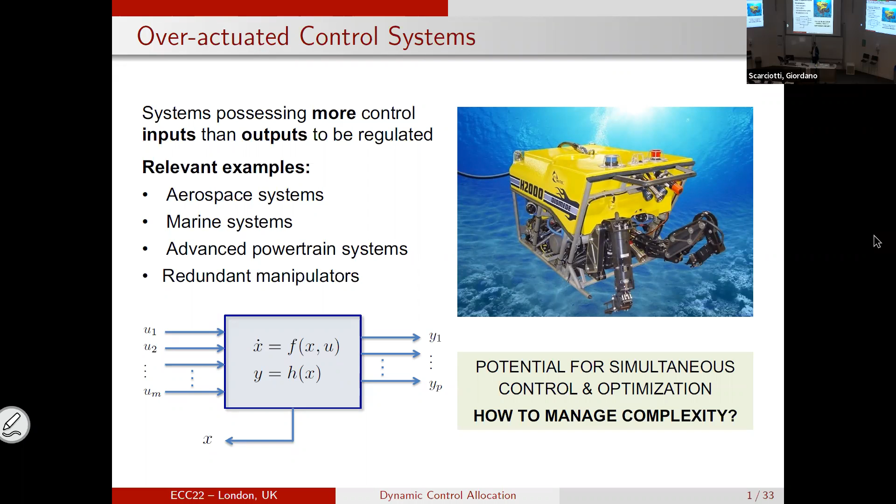So this being a fairly common nowadays setup, let's take a look at a couple of examples of over-actuated systems, because these examples give you a hint that there is perhaps a little more to over-actuation than simply having more things to deal with. The traditional idea of control allocation and over-actuated systems stems directly from aerospace applications. Everybody has flown an airplane in their life.

If you sit by a wing, you see a lot of movable surfaces going on. Of course, one cannot really see the tail effectors, because otherwise that would be a problem. But you see that there's a lot of things that move when you take off, when you land, and when you steer, when the pilot steers the engine.

Typically in civilian applications, all these control surfaces generate moments, or are thought of as moment generating devices, meaning that you have a lot of control inputs aiming at producing the three body moments around the axis. And typically in civilian applications, the resulting forces, called the body forces, are actually named the small body forces because, well, they may not be that small, but we think they're small, so we ignore them when we design control policies.

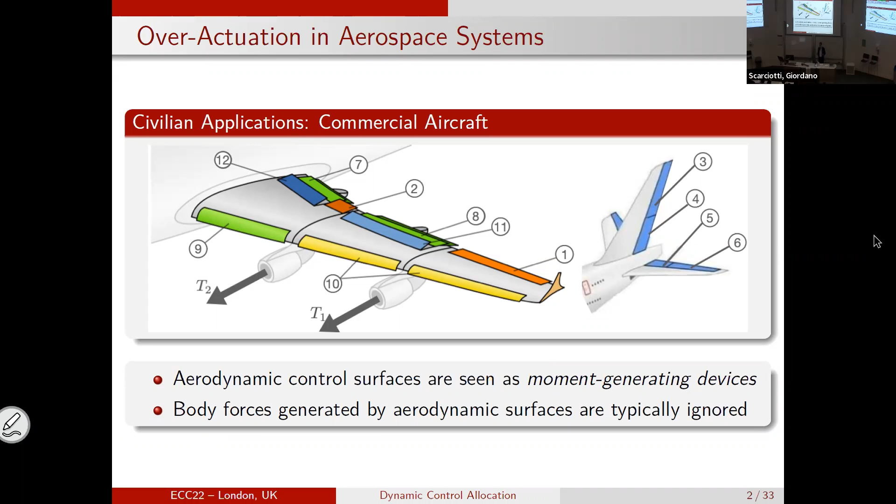Now this changes dramatically when within the aerospace area you start looking at more performant types of vehicles, for instance fighter jets. Fighter jets are again equipped with a redundant set of actuators, but the type of actuation that results from this control suite is actually very different, because now you have the presence of multiple surfaces that are typically not seen in commercial aircraft, for instance canards, and canards are very interesting actuators, so we will talk a little bit more about this later.

You also have, for instance, unconventional actuation capabilities like thrust vectoring, meaning that your thrust is no longer confined in one axial direction as in conventional aircraft, but has the ability to change angles, so to produce not only a force in the X-body axis, but also forces around the other two body axes, which gives you almost 6 degrees of freedom controllability in certain aircraft. Well, of course, almost, because you can't really fly like this - that's too much drag to begin with. And also you have enhanced maneuverability, which is dictated by the very reason of existence of this type of vehicle.

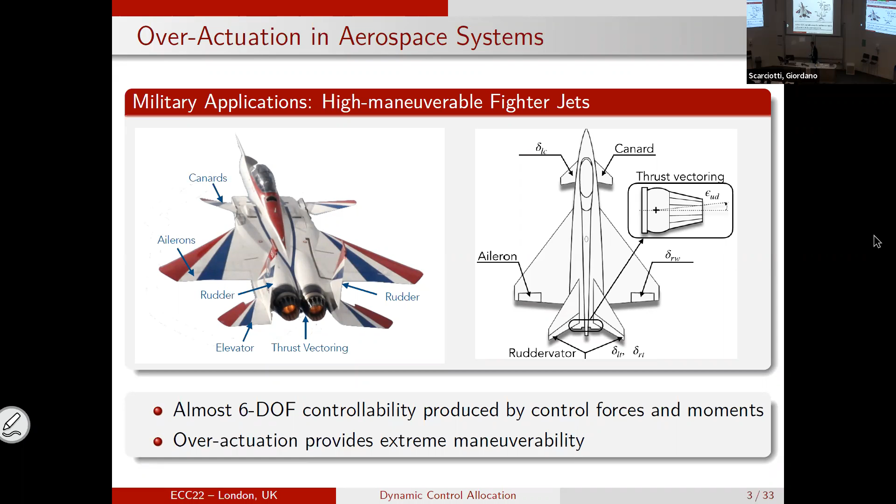So you see already that within the same type of application, perhaps there is a difference between one way of looking at overactuation with respect to another. Obviously this is not a new problem, it's been around for a long time, and there is a considerable body of literature on that.

So if one thinks about overactuation, you say, okay, I have a control problem, I know I can do more. Whenever you do more, you want to optimize what you're doing, because now you have the freedom to do better by having more actuations at hand. So obviously, when you talk about optimization, online optimization, model predictive control is the natural way to go. And as a matter of fact, there is a substantial body of literature that deals with control allocation and distribution of control efforts by way of model predictive techniques.

Our friend Ilya Kolmanovsky is one of the main contributors in this area, specifically related to control allocation, but many more as well. So now, what is the pro of looking at solving the problem of control allocation, simultaneous control and optimization through model predictive control? Well, the pro is that in a model predictive control type of framework, we know we can design directly our controller to be mindful of constraints, both in the input and in the state variables. And also it is of general applicability.

However, at least for me, I don't understand much about optimization, I have to confess. Model predictive controllers are quite cumbersome to tune. They don't scale really well with the dimensionality. But the thing that I was very interested in is that model predictive controllers are not modular.

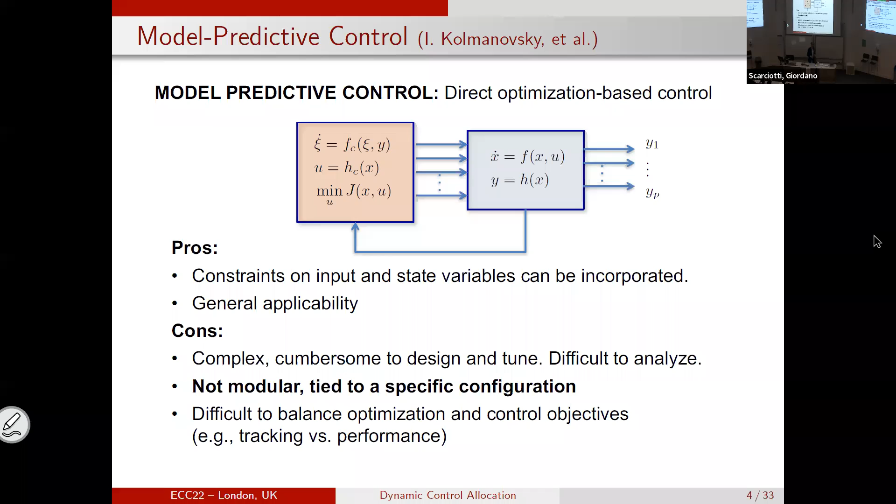Obviously, model predictive controllers embed everything in one piece, successfully I have to say, but they do not lend themselves to a modular structure. Also, it's very difficult, at least I find it difficult, to separate the tracking performance from optimization of auxiliary values.

Perhaps the premier methodology for dealing with a redundant set of actuators is the so-called control allocation.

Control allocation has a long-standing history, started from the work of Wayne Durham for aerospace application, and then continued with many researchers. I'd like to mention our great friends at NTNU, Tor Arne Johansen, Thor Inge Fossen, and Andrea Cristofaro, who may be in the audience, who have contributed to this sort of thing. Tor Arne and Thor Inge are mostly interested in applications in marine vehicles and underwater vehicles.

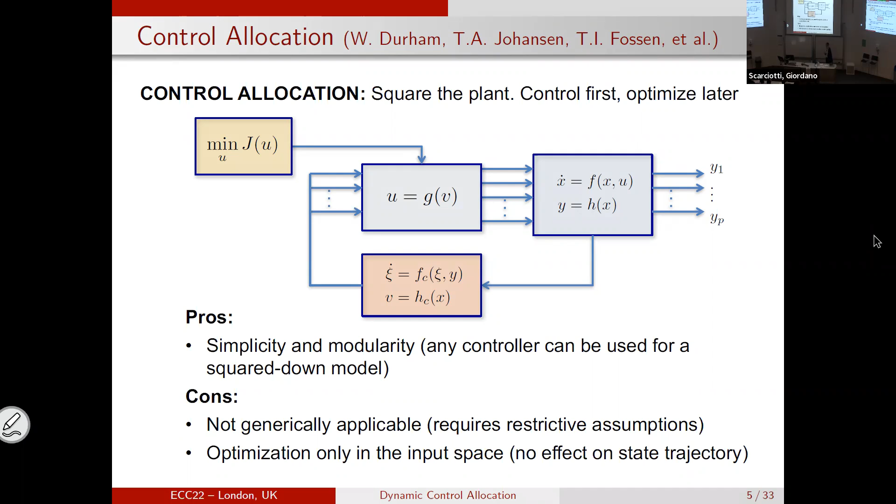So now let's take a look at control allocation in a traditional way. Okay, so what do we have? We consider a nonlinear plant model, but the nonlinear plant model here is just because I want to be fancy. If you want, you can replace it with a linear model. Really nothing is going to change.

I know there's a little bit of geometry in the title of my presentation. It's not going to be any differential geometry, okay. The geometry you'll see is in a linear setting, but the ideas remain the same. Everybody who says that nonlinear systems are so different from linear systems is telling a lie — at least from the geometric point of view, it's just a linear system bent, in a certain sense. Okay, so Isidori is going to kill me. Is Alberto in this audience? No, okay, that's good, he left, okay great.

Okay, so we have an affine system. The main issue here is that the control input is higher dimensional with respect to the regulated output, so M is greater than P, where M is the number of inputs. But the standard assumption here is that the rank of the input operator, the B matrix, is actually equal to the number of outputs to be regulated.

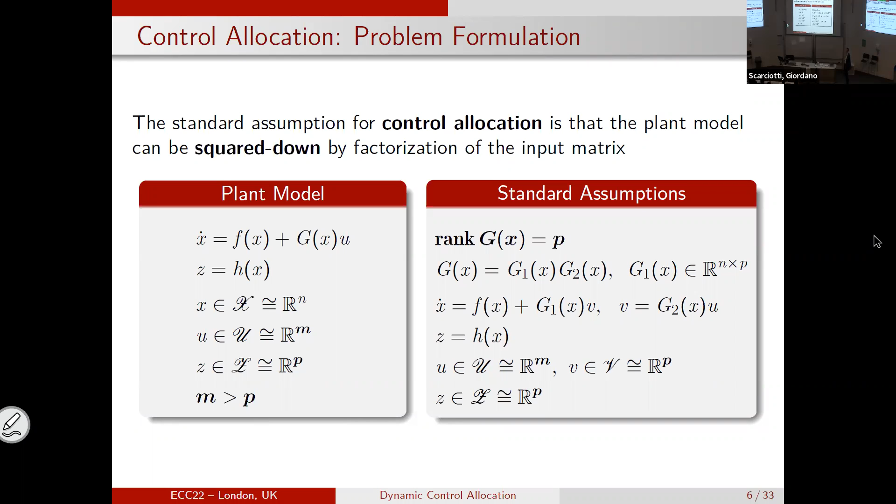So which means that you have a rank-deficient input operator, and therefore you can factorize the input operator in such a way that you can now redefine a fictitious input, a virtual input. Virtual input is one of those fashionable terms dating back to the 90s in backstepping control. So you have a virtual input here, and you can now think of this system as being a square system for which you have a plethora of control design methods. Now you have the task of going back from V, where you've designed your controller, to U, which is where your physical actuators reside.

So pictorially, we can represent the situation in the following way. You have your plant and your input operator G, which is factorized into G1 and G2. Then you identify this virtual controller V, same dimensionality from V to Z, which means that if you're trying to find, let's say, a tracking controller, this tracking controller is essentially unique, okay?

There's modulo some initial condition you set on the inverse dynamics, but ideally you can think of this as a unique solution to your tracking problem. And now what you do is take the same control devised for the lower dimensional input, and distribute it across the set of redundant actuators through control allocation, typically done by static optimization or some type of gradient descent or dynamic optimization.

So you may ask, what is wrong with this picture? Absolutely nothing. This works very well and has led to a lot of solutions which are both imaginative and very elegant. And again, I'm the least qualified person because I'm not very strong in optimization, but I'm amazed at the type of solutions, and these solutions work, okay.

But there is one slight problem. Well, first of all, from my own perspective, I like to see the structure of problems, I like to see the geometry that's behind a certain setup. So I'm always wondering, what are the necessary and sufficient conditions for the solution of a problem? And this comes with the fact that not all the models that we work with, stemming from technological applications, fit nicely into this framework.

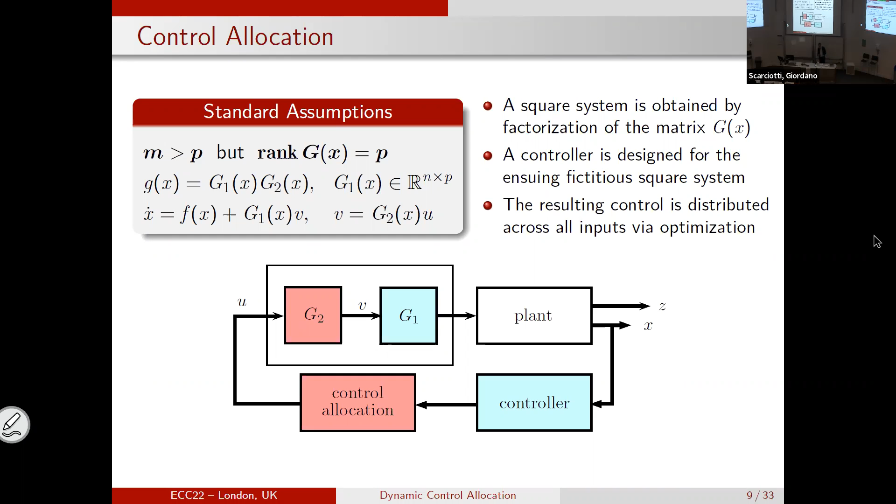As long as you confine yourself to aerospace and you just don't think of the body forces generated by the actuator, this is perfectly fine. However, when you start going a little bit more fancy or imaginative in your array of set of aerospace vehicles, things change.

And I want to point out this super nice object here. This is what is called a modular drone that was conceived by the group at CASY in Bologna, led at the time by Lorenzo Marconi and Roberto Naldi. This is nothing else but a tail-sitter MAV, okay? It has one big thruster here, producing a thrust, and then it has 8 control vanes, control surfaces, and you typically want to control the position of the center of gravity of the vehicle and the heading angle.

And you have 9 control effectors, 1 thrust and 8 control surfaces. And you look at the dimension of the output, you want to control 4 outputs, and you look at the rank of the matrix G, the input operator, the rank is 4, bingo, you are exactly in the setup of the traditional, let's call it this way, control allocation problem.

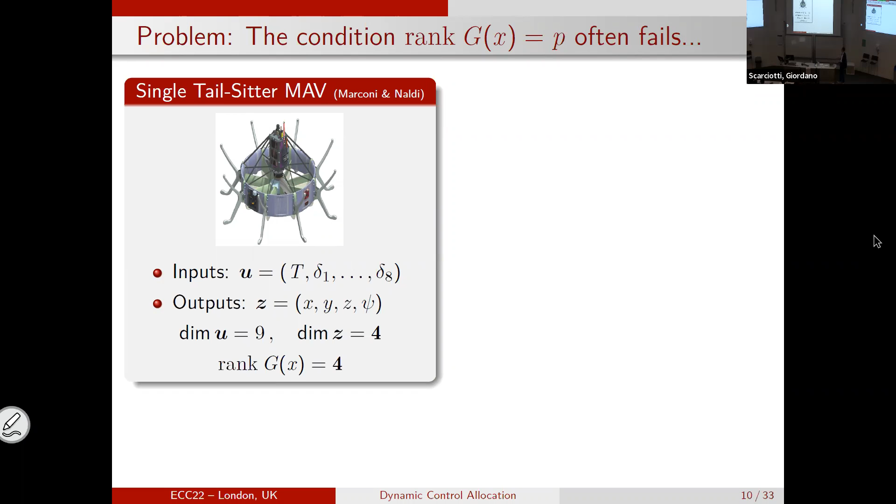But this tail-sitter MAV, as conceived by Lorenzo and Roberto, was not meant to be left alone. It was meant to be attached to each other in several modules. So if you now take 2 of those and connect them rigidly in this way, now you are doubling the number of inputs, which is as expected. You have 2 thrusts, you have 16 control vanes. Of course, you have constraints because otherwise you will rip the setup apart.

But you want to control the same thing, okay? Because now this is, again, a rigid body. So what I'm interested in controlling is the center of gravity, the position of the center of gravity, and the heading of the vehicle. But now I have an enormously dimensional input space, again, with the constraints in place. 4-dimensional control output, but now I look at the rank of the matrix G, and magically something happens: the system has gained in the rank of your control matrix.

Which now starts saying, oh, okay, controllability distributions. So that's something more that you can do now, not just in terms of regulating these four outputs, but perhaps now there's a new direction. But most importantly, the first order outcome of this is that this is no longer within the assumption of the control allocation, because now the rank is greater than the number of outputs to be controlled.

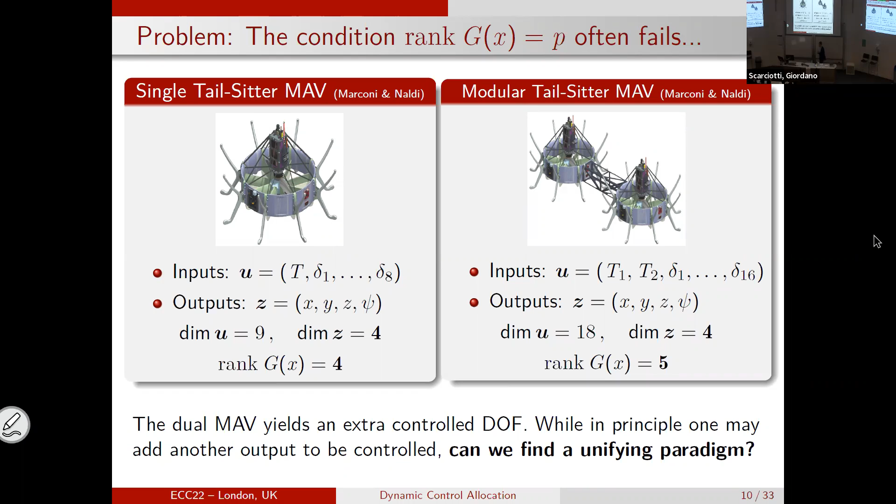Okay, you say, this is not a big deal, I can identify a new output that I want to regulate and go back. But this is precisely what I don't want to do. I don't want to just settle for something that is dictated by my control policy. I want to understand what's happening and maybe devise a control policy that is more unifying, that can deal with the previous situation and this new situation, in such a way that I don't have to reshuffle my control problem all the time. But wait, there's more, okay?

So this is the one situation that I was dealt with when I started working at AFRL. What you see here is a pictorial representation of a hypersonic cruiser. There's a lot of talk about hypersonic vehicles these days, mostly for unfortunate reasons, in the context of the war that is going on. Well, this is AFRL, so they are in the business of building weapons to a certain extent.

But let's take a look at the longitudinal dynamics of this vehicle. This type of vehicle has its own aerodynamic issues. Their dynamics, although written in the same way, are slightly or dramatically different than the dynamics of conventional aircraft. But let's not get into many details, let's just take a look at the longitudinal dynamics of this vehicle.

This is the dynamics in the vertical plane. Very simple dynamics comprising the airspeed, the flight path angle, the pitch angle, the pitch rate, and the angle of attack, defined as the difference between these two. So what are the inputs here? The inputs are the thrust generated by the scramjet engine and the elevator deflection that actuates the moment.

If this was a conventional aircraft, I would say I'm thinking of the elevator deflection as the principal actuator that generates the pitching moment, and everything is okay. Unfortunately, what you see here is that the lift force, the force that keeps the vehicle afloat, also depends on the elevator deflection.

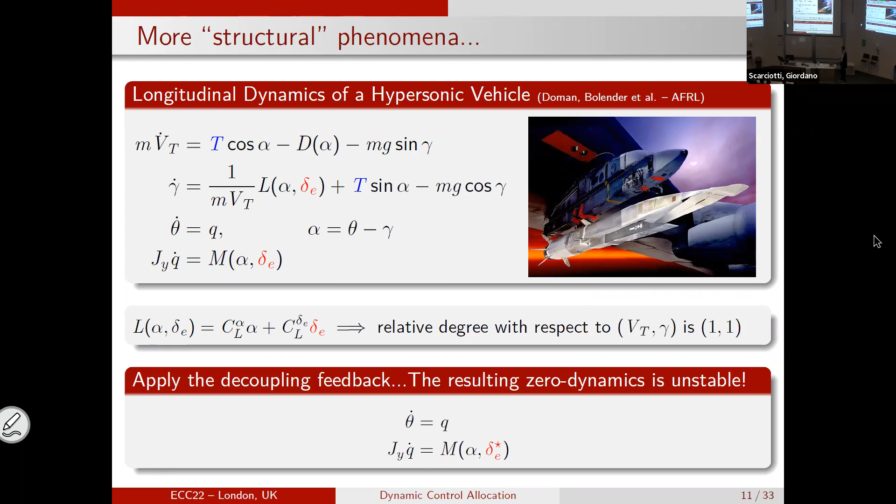So we'll say, okay, let's equip this vehicle with a non-conventional actuator, which is a canard. A canard is this additional control effector that is put fore of the center of gravity. Now, what a canard does is it changes the controllability of the vehicle in a very fundamental way. Well, not really, but I'll explain why.

So basically what you have now is two surfaces. It's no longer just an elevator, but also a canard. And the canard enters in the same forces and moments as your elevator. So now you have two surfaces to play with.

And obviously what the aerospace people do is say, let's just design the canard to get rid of the elevator contribution on lift. This is called ganging of the surfaces. So basically what the elevator does, the canard does in the opposite direction, so that there is no more contribution of the elevator to the lift force.

And for us control people, this means now that - okay, this means now that the system has full relative degree. Of course, you need to add a little bit of dynamic extension. The system is now fully linearizable by feedback. You cannot really make it fully linearizable because you don't know the dynamics, but that's a different story. From a structural perspective, you gain full relative degree and you're super happy.

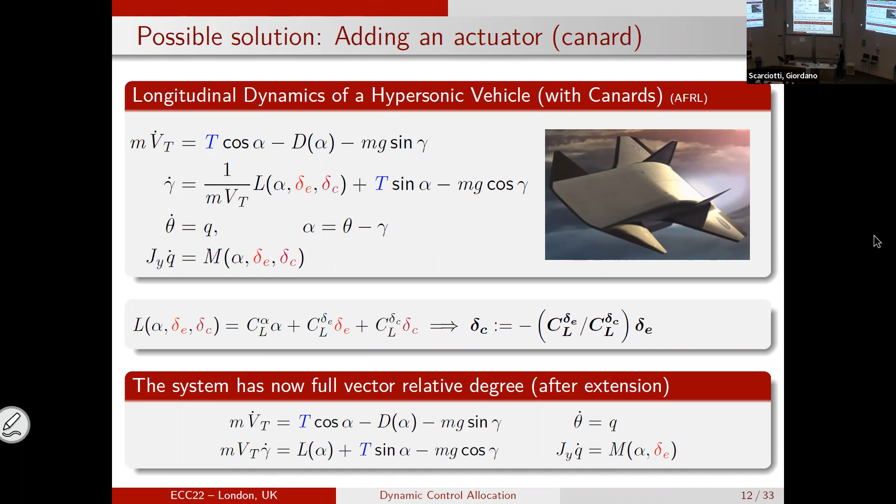This is a new example to draw inspiration from. We are not just happy with the technical solution to a problem, we want to understand what's behind it. So structurally, what is the deal with over-actuated systems? By structurally, I mean from the point of view of the geometry of your system, what is going on when you have more inputs than outputs.

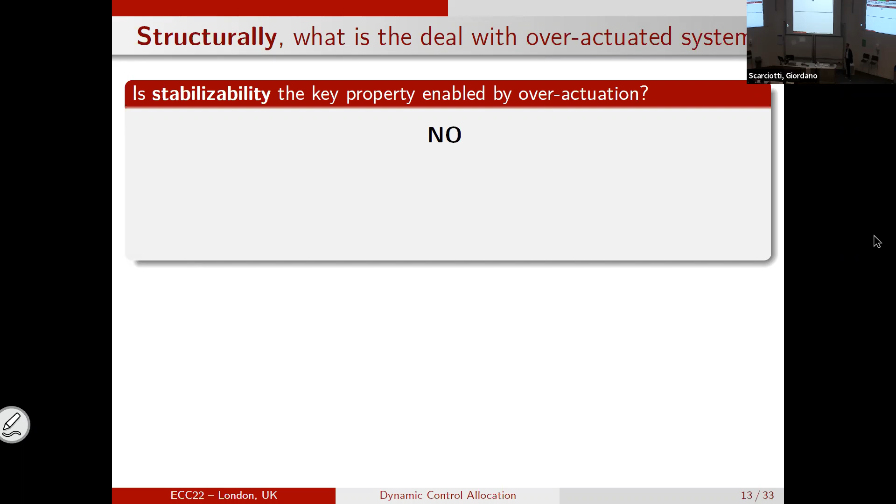The first thing that comes to mind, if you look at the previous example: I didn't know how to stabilize the system first. I had the canard, now I know how to stabilize it. Therefore, over-actuation has all to do with stabilizability. No, it has absolutely nothing to do with stabilizability. In the previous problem, the aerospace vehicle, the problem is us, not the system. The problem is that we don't know really well how to control non-minimum phase, non-linear systems.

But that has nothing to do with the amount of inputs that you have. Of course, if you don't have enough input, there's nothing you can do. But there's something that we have understood from the previous example, and this is the key, in my opinion. When you add the canard, you're not changing the fact that you can stabilize the system, because at first approximation, the system remains stabilizable with just the elevator. What you did is change the structure at infinity of the system. When you go from relative degree 1,1 to full relative degree, what actually happens is that you remove the zero dynamics.

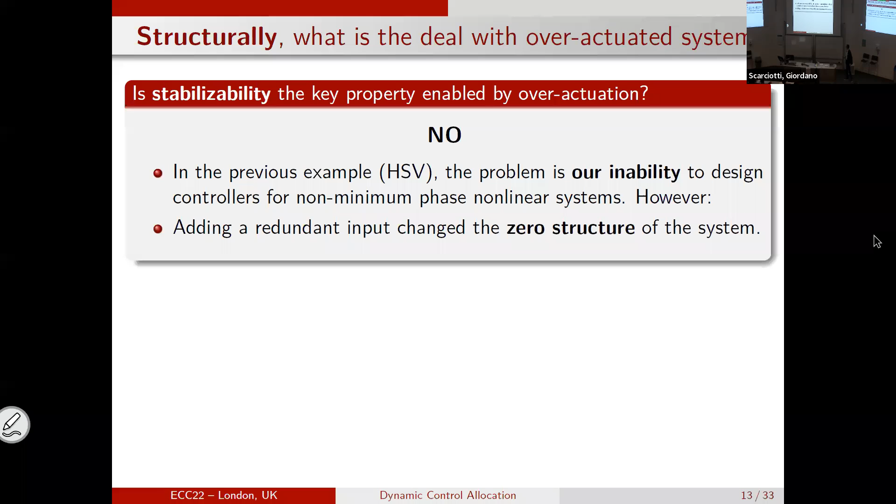Thinking linearly, because there's no way you can understand anything if you don't think linearly. This may come as a surprise to you, but perhaps not the old timers in the audience: controllability is a generic property for linear systems in the space of parameters. Meaning that if you have a system that is non-controllable, that's an oddity, that's a singularity. It's an open property in the parameter space, controllability. And it has nothing to do with how many control inputs you have. You only need one control input.

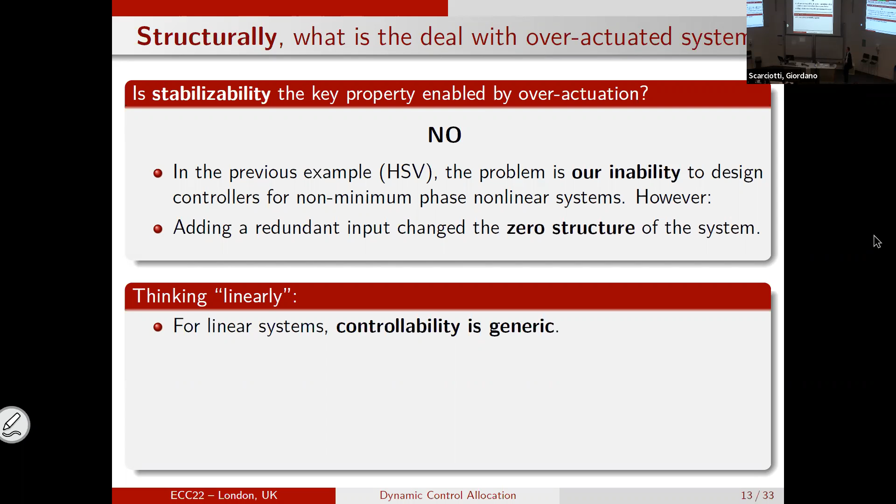And as a matter of fact, many of us remember that there is a technique to control multi-variable linear systems by applying a preliminary feedback. So you make the system controllable with just one input, and then you apply the Ackermann formula. Is that a good solution? Probably not, but it's a solution. So controllability is generic, has nothing to do with how many control inputs you have.

But what you see from the HSV example is that the canard has removed the invariant zeros of the system. Without the canard, your largest controllability subspace, which is basically the set of trajectories on your zero dynamics that are controllable, is zero, because you don't have any more control inputs than the one you need for tracking. What you have is that your zero dynamics is isomorphic—I apologize to all the geometrists and algebraicists in the audience—to V star mod R star, which is the subspace of the factor space where the induced map has unmovable eigenvalues. Basically, these are the zeros of the system, and that's where the zero dynamics tells you this is non-minimum phase.

When you add a canard, your zero dynamics becomes fully controllable. So your system remains stabilizable, your system remains controllable, but now you have extra degrees of freedom to move the invariant zeros. Therefore, you can assign eigenvalues to what was previously an unassignable dynamic induced on the factor space.

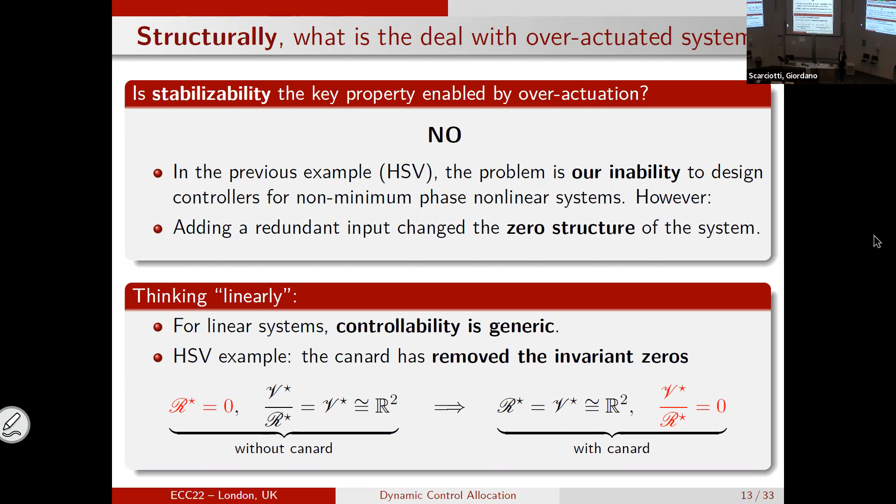Which means that overactuation fundamentally has something to do with the zero structure. And when you think about zero structure, you think about the zero dynamics. We all know that the zero dynamics is a very powerful concept for stabilization, and we have countless applications of zero dynamics. Backstepping is zero dynamics—it's redefining the zero dynamics at each step. But there's one thing that is the true essence of the zero dynamics in the system: the true essence is the right inversion of the system.

Now, when you do tracking, you have to do two things. You have to generate a motion in your system that produces the output that you want, and then you want to stabilize that motion.

So there is no escape when you solve a tracking problem from solving an inversion of your model. So let's recall what is the right inversion of a system.

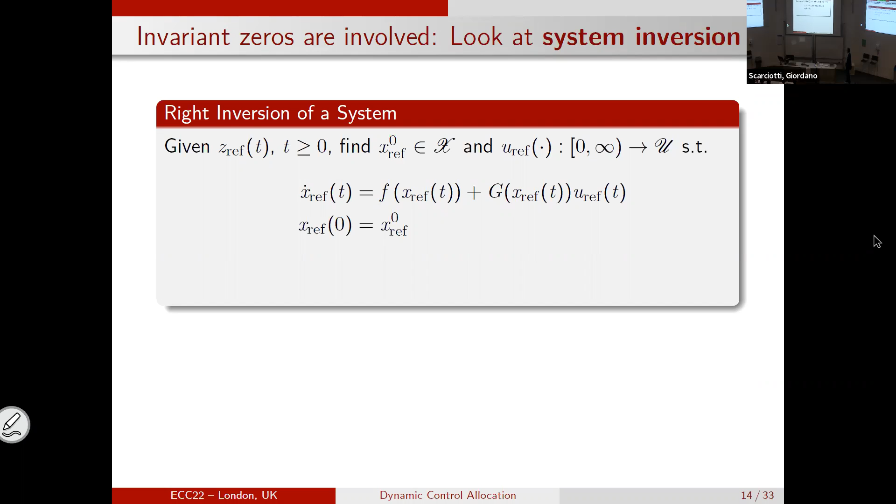You are given a reference in the output. You want to find all pairs of initial conditions and open loop inputs such that when you initialize your system at the right initial condition and apply the right input, magically your system reproduces in output the reference trajectory that you want. And that's precisely what it's written here.

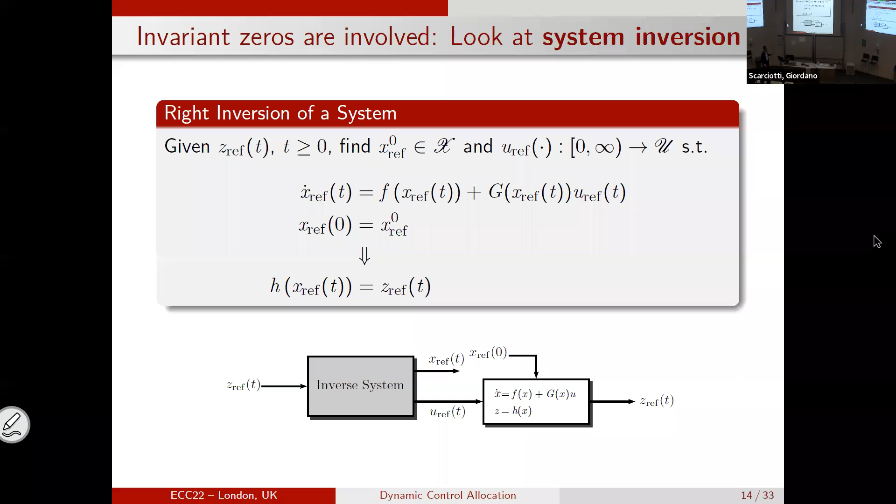So now the connection is starting to unfold. More inputs does something to your zero structure. The zero structure is intimately connected to your right inversion of a system.

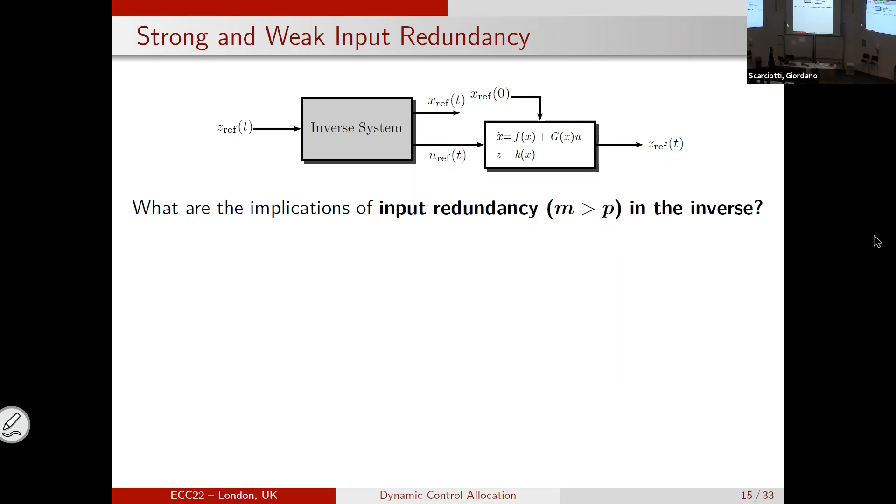But now let's see what are the implications of redundancy, m greater than p, not on the plant model. I'm no longer interested in the plant model. I'm interested in the inverse, the right inverse of the plant model.

So now we have all the different situations that are possible. The number of inputs is greater than the rank of the input operator, but the rank of the input operator is equal to the rank of the output map, the differential. Think about the C matrix, doesn't matter, which is equal to P.

This is precisely what Luca Zaccarian in a nice paper in Automatica called the strong input redundancy, and I shamelessly use his terminology here, although Luca did this for linear systems in transfer function form. This is precisely the situation of the traditional control allocation.

The second situation, Luca calls it weak input redundancy. Now you have a full rank input operator, same number of inputs as the rank of the matrix B or G, but this is strictly greater than the rank of the output map, which we just take equal to the number of outputs.

This is a situation precisely where traditional control allocation cannot be applied. This is not what happens. And then you have a general input redundancy, which is the two of them combined.

This, number 3, is the multiple drones of Lorenzo and Roberto. The weak input redundancy is the case of the hypersonic vehicle. Of course, there is an uninteresting case, which is the one where the rank is less than the rank of the output, but this means that the system is not right invertible, so we don't care.

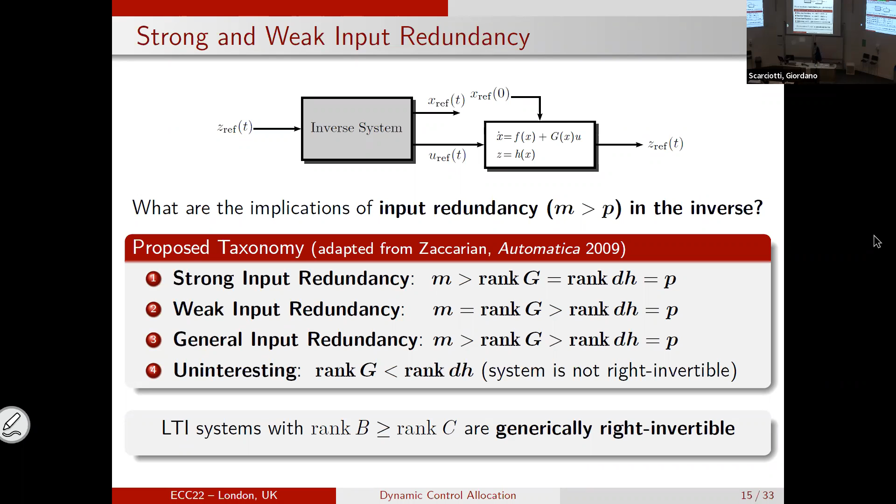So now we understand that overactuation is intimately related to right inversion. That's the right notion to think about when you think about overactuated systems. Now, there's also a standard trick. Now, I want to pause for a second. Having built this connection...

suggests that if I have more inputs than outputs, I will have some freedom in choosing my right inverse, and that's precisely the case. The question is, how do I compute my right inverse? There are standard methods, Silverman's inversion method, and so on.

But you can also use a trick. Right invertibility is invariant with respect to state feedback. So what you can do is apply a fictitious feedback to your system, compute the inverse for this new fictitious system, then revert the transformation, and bang, you obtain the inverse for the previous system.

And the question is, why on earth am I doing this? Why am I complicating things? Can I just simply compute an inverse for my original system and get over with it?

Well, this feedback that you apply preliminarily helps you, or may help you, unlock the internal structure of your right inverse. You can do anything with the feedback, right? But in our geometric understanding, we know that certain feedbacks are better than others because they are friends of certain subspaces. Meaning that, very simply speaking, A plus BF will contain a lot of zeros all of a sudden.

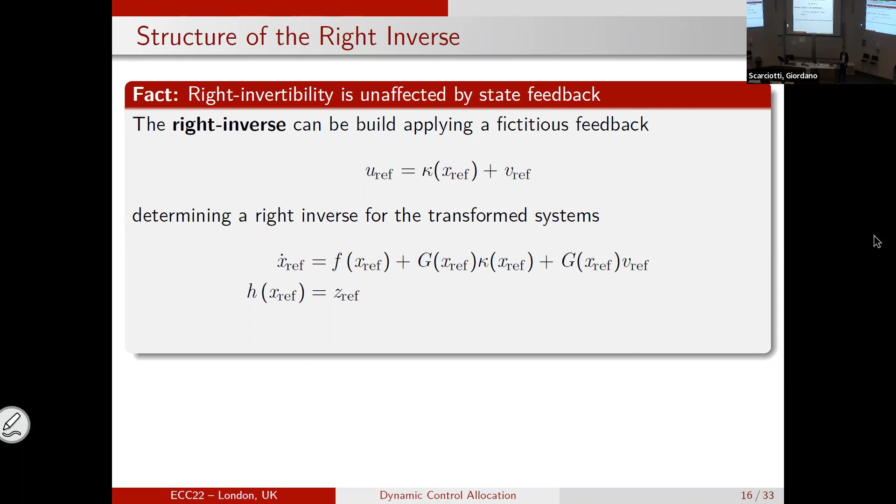So you know, okay, this subspace is invariant. This matrix is factorized in a way that I know this thing does that, I know this thing does that, so I can sort things out. It's like when you take your closet, it's a big mess, and you start putting all your stuff in order. That's precisely the spirit of applying a feedback, which is a friend of a manifold.

Now, the type of feedback you want to use depends on the type of redundancy. For strong redundancy, it doesn't matter, because all your redundancy is in the input space. All you do is basically navigate in the kernel of G, so it doesn't matter.

But in weak redundancy, you do want to use a particular feedback, which is the friend of either the largest controllability subspace contained in the kernel of C, or the largest controllability distribution contained in the kernel of DH. Translated into understandable language, it means you create a lot of zeros in your maps, and you just sort things out.

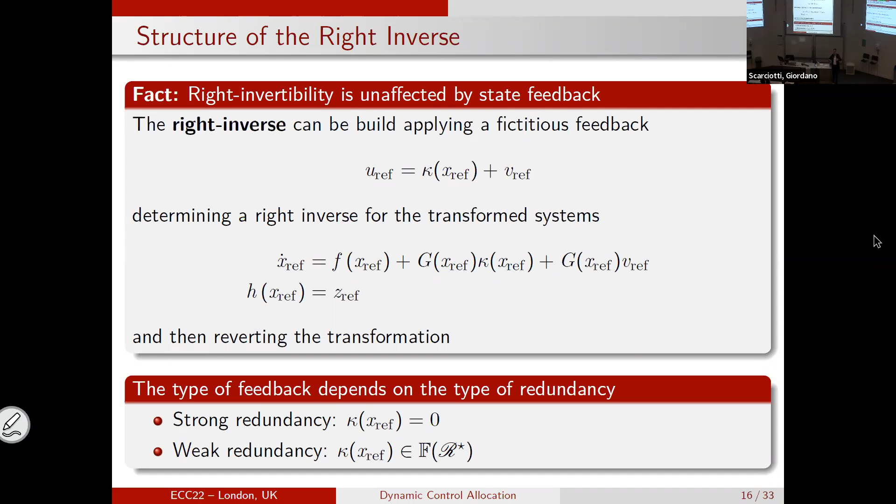And of course, what you do when you have a board or an audience that's already bored, and you want to impress them, you put a commutative diagram, right? This is a standard device for people to go, wow, that's a commutative diagram. Yeah, we have a commutative diagram.

So let's take a look at the case of linear systems, because we don't want to deal with the differential geometry stuff. If you look at strong redundancy for linear time invariant systems, remember this is the case where you have an input operator that's rank deficient, but the rank is equal to the number of outputs. So you have a kernel of B, and you know that any input in the kernel of B will not reach the state space, because they end up in the zero map as a kernel, and therefore will never affect the output. No matter what type of feedback you're using.

But then you can factor out the kernel of B and look at a reduced system defined on an input space, which is the input space modulo the kernel of B. This system down here is a dynamical system, and it's a square system. So you have a unique inverse for this lower dimensional system, and all your degrees of freedom are in the input space. Your strongly redundant system is essentially just a memoryless map, the zero map from kernel to X, and you can resolve redundancy simply by a canonical projection modulo the kernel.

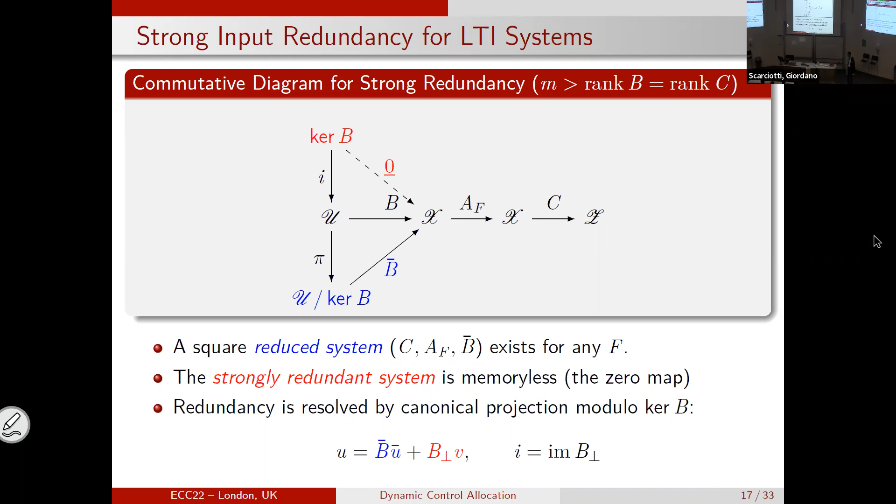But when you have weak input redundancy, this is precisely why you want to use a preliminary feedback when you build the inverse. It's only when you use a preliminary feedback, and the feedback is a friend of your largest controllability subspace contained in the kernel of C, that you unlock the structure of the inverse. Now the structure of the inverse is displayed in the same way. You have an upper subsystem which does not affect the output, and you have a lower subsystem which lives in a factor space. And that system is square.

So if you want to compute an inverse, just look at this. The inverse is unique, you're good to go. But the top subsystem gives you all you can do in the inverse, in addition to the one you necessarily have to compute. So the top subsystem is now a dynamical system. That's the difference from the previous case.

In the previous case, the redundancy was just in the input. Now you have a redundancy in terms of forced trajectories, controllable trajectories, evolving in a subspace which has been made invariant by an appropriate choice of feedback. All these trajectories are unobservable from the output, meaning whatever you throw in here, it's not going to affect your inverse. And mind you, I'm not doing anything to the plant model. I'm still using the controller that Ford has given me, because it cost them like $20 million, and they don't want you to mess with it.

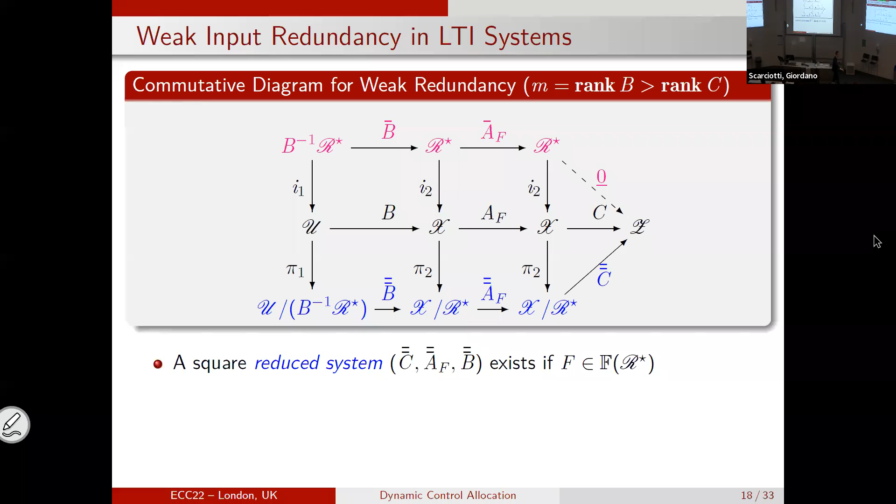I want to show you a couple of pictures which show precisely what I'm telling you: the case of strong input redundancy. That's the inverse, okay? So you have a reference trajectory in the output. There's only one trajectory in the state space which reproduces this trajectory in the output, only one. And this is created as a motion of your system by an appropriate control.

But this control now has infinitely many choices. This is basically the equivalence class modulo the kernel of B. So one reference in the output, only one reference in the state, but multiple, infinitely many references in the input, meaning your optimization lies there. That's control allocation, the standard traditional control allocation.

Now, the other situation, the weak input redundancy, is different. In correspondence to one output trajectory, you have infinitely many state trajectories which can reproduce this function as an output of the system if you're forcing the input by the correct input. One output, infinitely many trajectories. For each one of these trajectories, one input, and only one input will produce this as a motion.

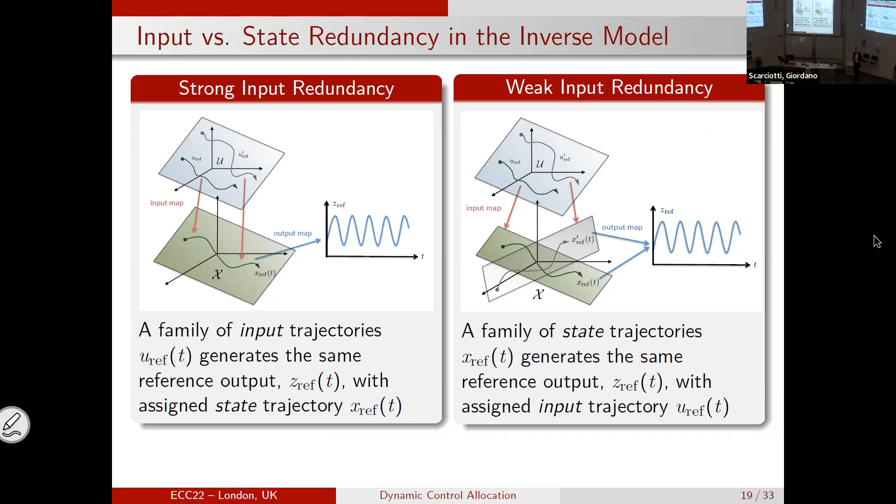You can skip the middleman, think of this as optimization in input space. Not really, that's not the best way of looking at it, because now you have the possibility of choosing the best trajectory for a purpose in your state space rather than input space. Confined to a subspace, confined to a submanifold, of course, but then you can do perhaps more. You can throw in constraints in your state space as opposed to just the input space.

And that's how you should be looking at the solution, in my personal opinion. When any tracking problem is solved by a 2-degree of freedom controller, there's no escape to it. If you want to do tracking, you have to have an inverse, a right inverse, and you have to have a stabilizer. But that's how our interpretation differs, because a stabilizer, you might as well use a fixed stabilizer. You can square the plant, you can do whatever you want, choose a stabilizer that it's better.

When you do LQR, do you really care how many control inputs you have? No, you have a really good way of assigning the control inputs. You just select the weights on your R matrix, and then you're good. So, okay, I have certain actuators which are slow. Okay, then I add frequency weighting.

It's great to see a young audience, but when I was young, the H infinity church was predominant, right? So we all learned about frequency weighted optimization in H2 and H infinity. Okay, so well, you have slow actuators, you have less powerful actuators, just weight them, design your stabilizer, and you're good to go.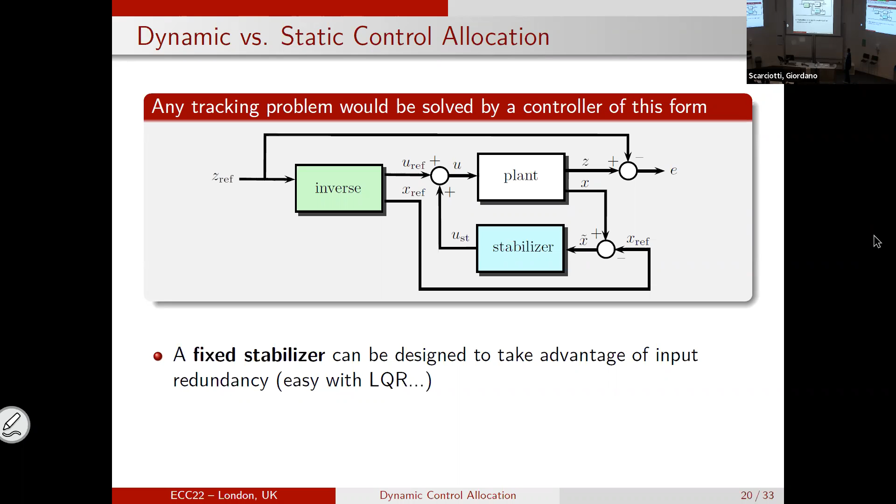And you take the stabilizer from form, for crying out loud, right? But now what you can do is in this guy over here, you can exploit the redundancy, not in the stabilizer action, but in the generation of the inverse. And now you can attach a mechanism that forces those controllable trajectories or the redundant trajectories in the input space to steer the system in an evolution that it's more convenient for your constraints, for your energy, while at the same time continuing to produce the trajectory in the output that you want.

That's the beauty of the redundancy in the inverse system. Because whatever you're doing here, you're not changing the fact that your system is tracking the same trajectory in the output. It lives in a big factor space. And most importantly, tada, you have a plug-in structure. You have something you can add to your existing control input by managing the reference.

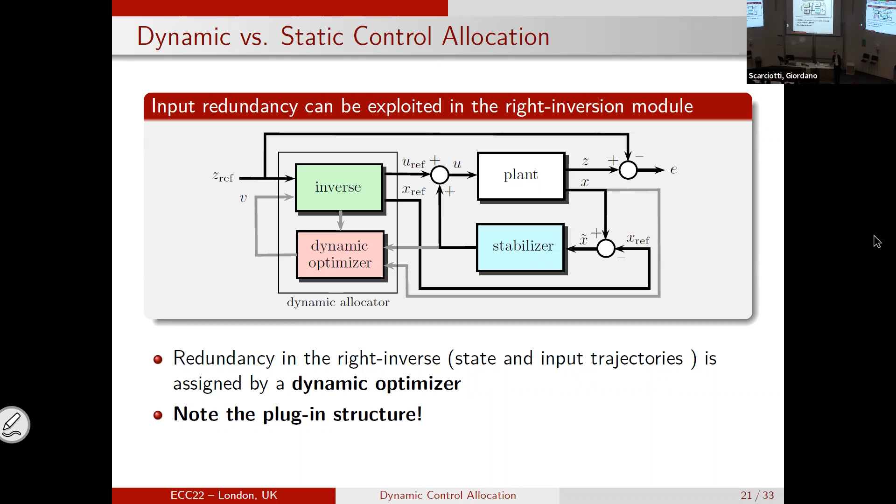Now, how do you effectively manage this reference? In linear systems, well, linear systems are easy. If you go back to that incomprehensible commutative diagram, for comprehensible for Thomas. Now, Thomas has seen this commutative diagram for a long time.

He's growing the beard because of my commutative diagram. But for linear systems, it's very easy. You look at the commutative diagram, the maps are right there. All you need to do is apply a change of coordinates, do a little projection. Everything is fine.

For nonlinear systems, there's no escape from a normal form. Okay, so if you're lucky enough that you have a well-defined relative degree, you look at the Isidori-Byrnes normal form. If not, the system is right invertible. You can use other quasi-normal forms, Silverman's algorithm. There is a very nice book by Alberto, a recent book that deals with exactly multivariable nonlinear systems.

So there are techniques to find normal forms, but at the very end, okay, so let's cut down to the chase. In many situations of interest from a technological perspective, your inverse is made of two parts. And this is the inverse for overactuated system. Note that you have an x ref. There is always an algebraic part where the reference in the state space is related to derivatives of the output.

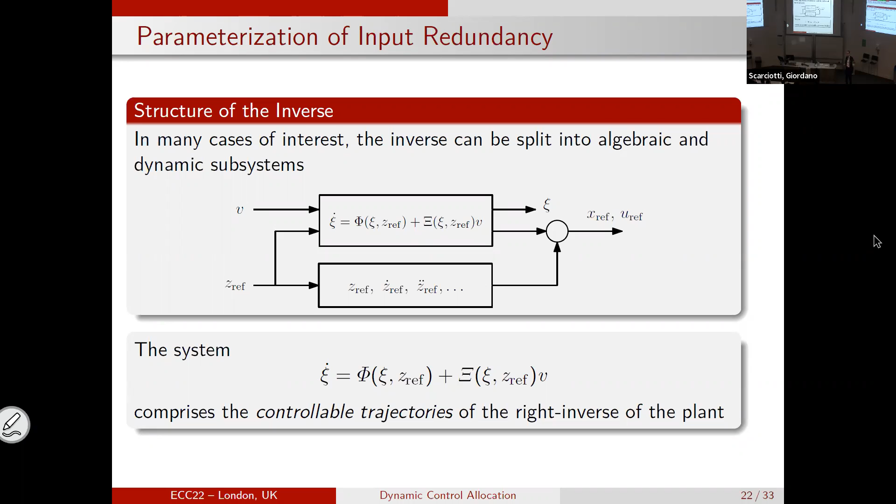But for us, this means that you can modify the trajectories of this part of the inverse without influencing your output. By doing that, you're changing the trajectories of your stabilizer in a completely transparent way, so perhaps you're not going to hit the constraints as much. And now comes the dynamic part of your control allocation.

So let's recap for a second. We have seen that we can rethink the overactuated system framework by thinking of redundancy in the right inverse. I know that I can generate multiple trajectories in the input space and state space in the inverse that keep the output where I want it to be.

How do I change this trajectory? I need some sort of parameterization. Let's assume we have a cost function that we want to minimize, and we want to minimize it by selecting at each time instant the best reference trajectory, the best steady state motion that minimizes this function, or at least moves toward minimizing it. First, I need to resolve the dynamic constraint imposed by the controllable trajectories on the inverse dynamics.

What do I do? Well, I use flatness. What is flatness? The 101 idea of flatness is roughly speaking the same as having full relative degree in your system, possibly through dynamic extension.

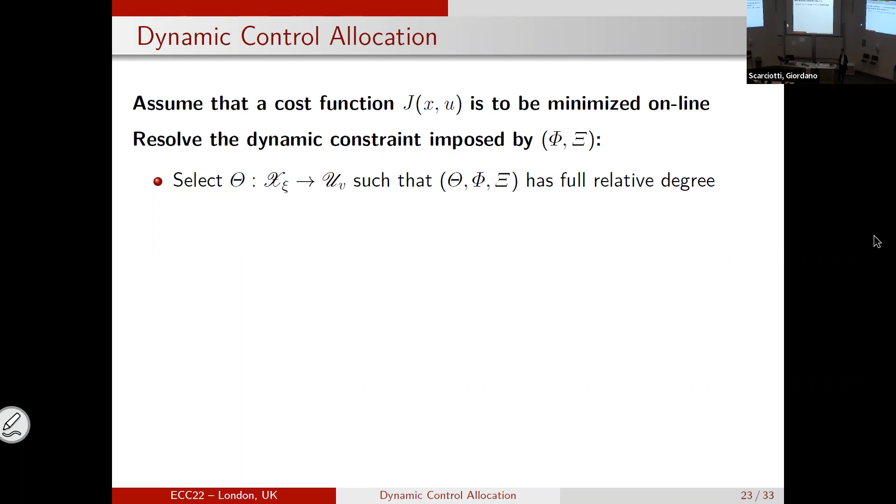At this point, you parameterize your solution on the zero dynamics as this deviation from a solution which is a steady state solution. So you pretend that everything is constant, and then you parameterize your trajectories from the solution of a regulator equation. I had to put a regulator equation in, it's so dear to my heart that it must pop up every once in a while. But this is just a way of saying, okay, everything is constant, and I know precisely what the parameterization is.

But things are not constant. I want these trajectories to evolve. How do I make them evolve? I make them evolve through a good old gradient descent.

But these trajectories are not constant. Of course they're not, which means there would be dynamics in the closed loop system. But wait a minute, I have a gradient gain here. I'm not going to bore you with the details, but you can prove that this interconnection between your allocator and your inverse dynamics, the controller couldn't care less, because everything the allocator does is in the kernel of what the controller does.

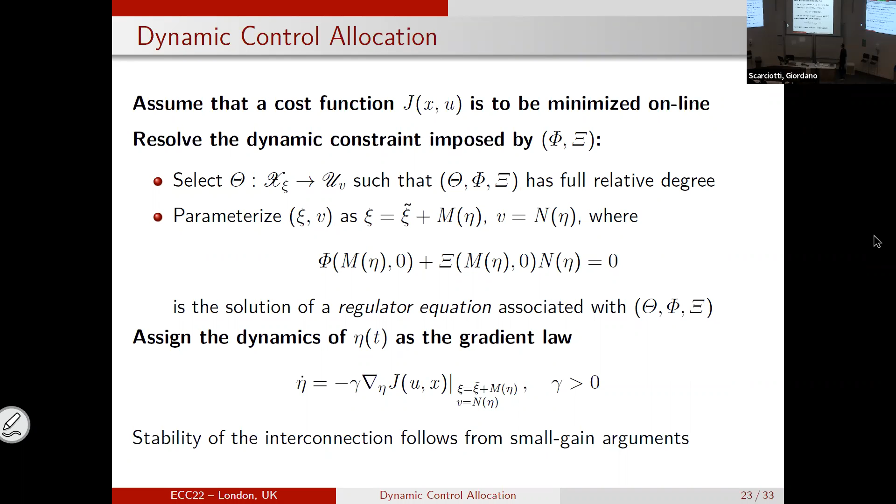But there is a feedback loop between your inverse model and your dynamic allocator. If you keep the gain not too high, you can invoke some two-time-scale behavior or small gain arguments that make this work. Let's see some examples.

I have, gosh, 7 minutes left, 5 minutes left. Okay, so let's go through two examples from aerospace research.

I had the pleasure of working with a very talented aerospace engineer, Raffaele Baggi. I was a student of Elisa Franco, we collaborated, it was at Riverside at the same time. He's super strong in aerospace, in air vehicle design.

So we designed a prototype simulation model of what we call a swellodrone. This is a conceptual over-actuated aircraft, one that has multiple actuators on the wing and the tail, and also a canard. So here you have a throttle input and 6 aerodynamic surfaces: right canard, right flap, right tail, left tail.

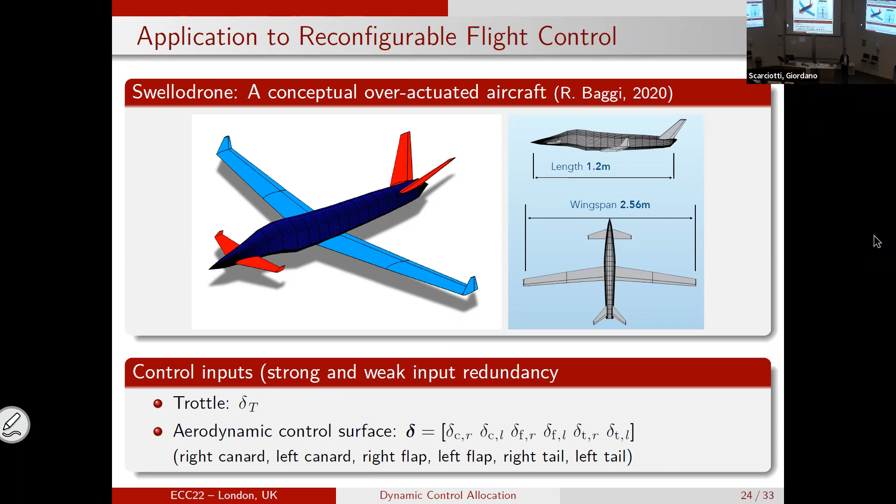Now, we have a standard vehicle dynamics, I'm not going to go through this, these are standard Euler equations. What I want to point out is that we have a thrust input in the axial x direction.

We have some body forces produced by the canard, that's important because that's what gives you the weak redundancy. We also have the controlled moment generating from all the other surfaces. Now, all the aerodynamic effectors have constrained dynamics, as usual as you have in aircraft.

You have rate limits, demand limits, you have a dynamics. You also have that the forces and the moments are parameterized by the effectiveness of the actuator. So if you lose a part of an actuator, your ability to generate a force is decreased. And you don't know about it because nobody's looking at the actuator. So unless you have a dedicated fault detection and isolation algorithm that tells you, well, look, you're thinking you're producing this much G-force, but you're actually not, okay.

And as a regulated output, we have the usual airspeed. We want to keep the side slip angle to a bare minimum, and we want to regulate the flight-path angle and the turn rate.

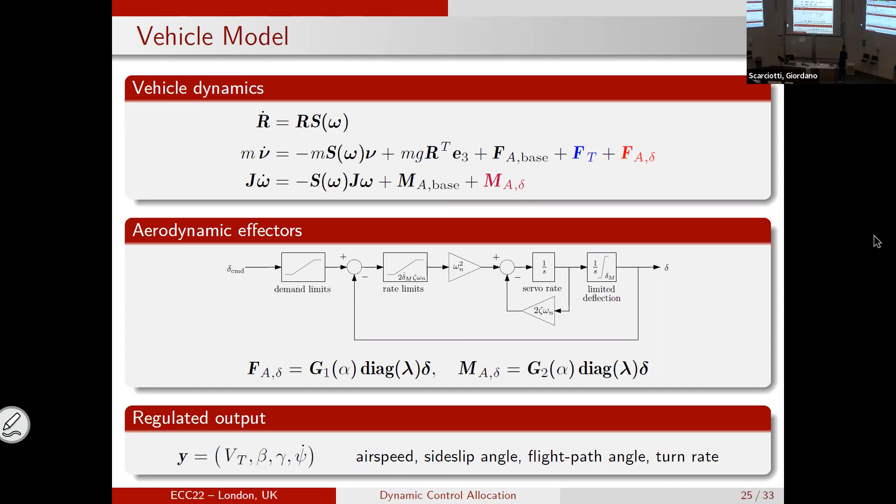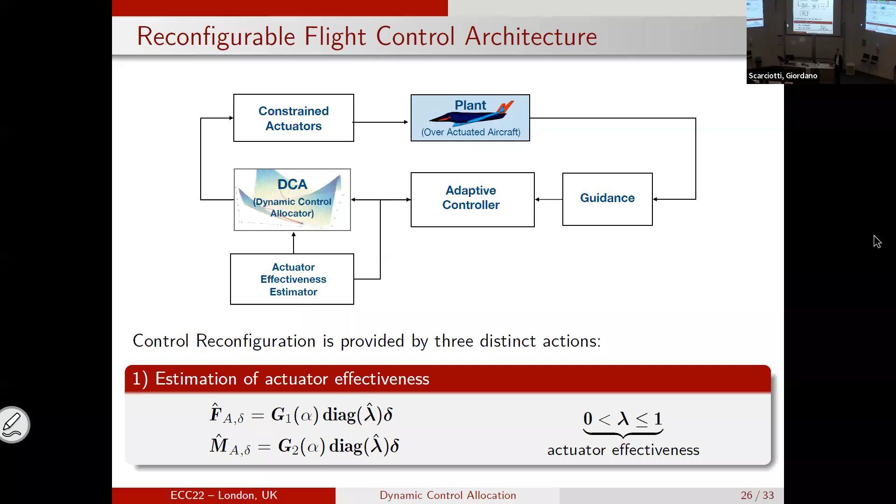Now, the first reconfiguration capability is done by the estimation of the actuator effectiveness. You can do this by, basically, nothing fancy. It's just indirect adaptive control. But then you have the dynamic control allocation.

The first is the one that deals with this strong redundancy. Okay, the kernel, those free trajectories in the kernel of the input operator with the estimated effectiveness. And this is a gradient descent. And the cost function is the difference between the actual deflection of the actuators and the one you command. Why is that important? Because there's the actuator dynamics in between. Okay, so if the actuator saturates, there is a difference between delta and the delta command.

And we want to move along the input space in such a way that this difference is minimized at all times. So from the point of view of the pilot, he has the impression, or we would like the pilot to see that the force he commands is the force that he receives. And the effect of the actuator dynamics is minimized. And this is an optimization in the input space.

But wait, there's more. We have weak redundancy. We can assign by canard the angle of attack. The angle of attack is the weak redundant state trajectory. And now we can actually change the angle of attack continuously in a way that we put our forces in the best situation to produce what we want. Remember that forces and moments depend on the angle of attack. So if you don't care what the angle of attack is, because you can control it to a certain extent, you can put yourself in the most favorable situation to perhaps remedy certain deficiency arising from faulty actuators.

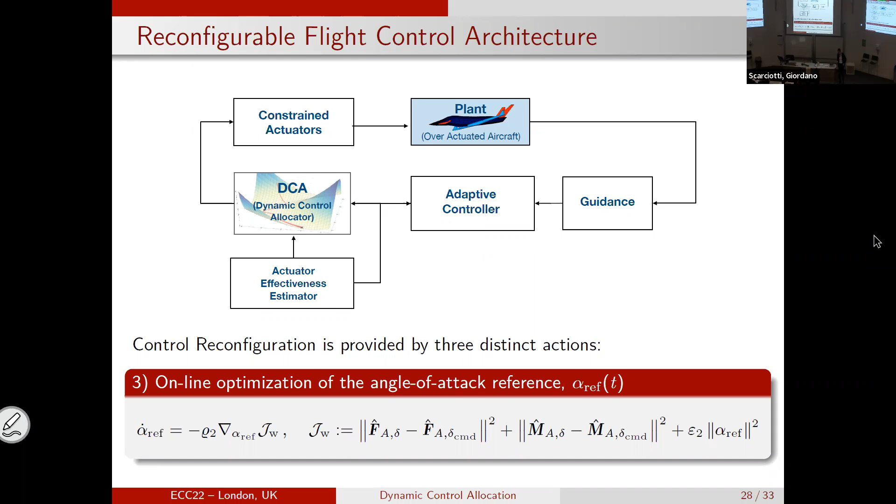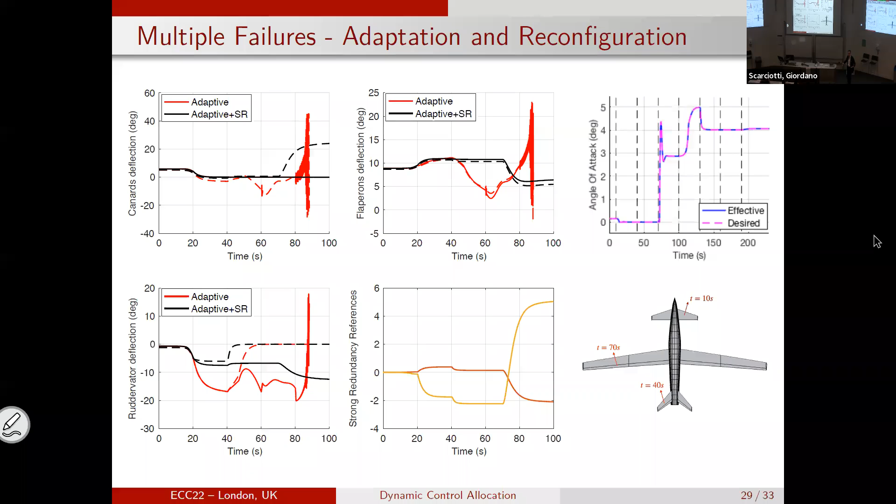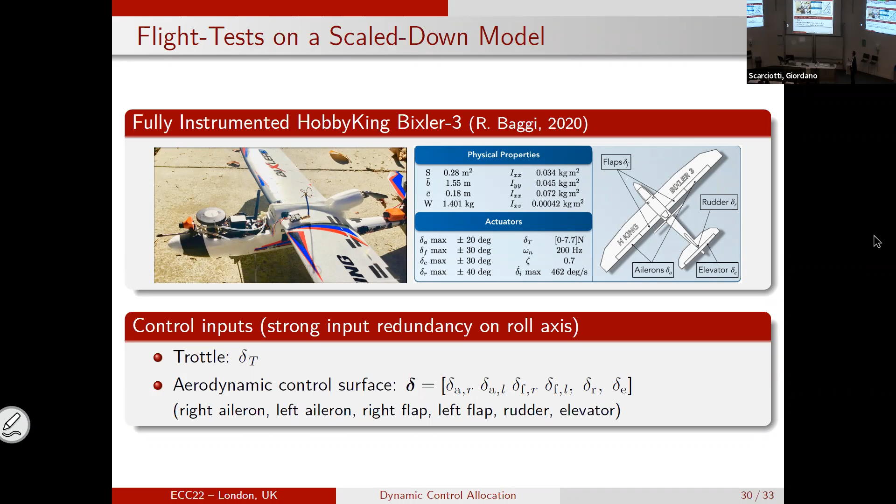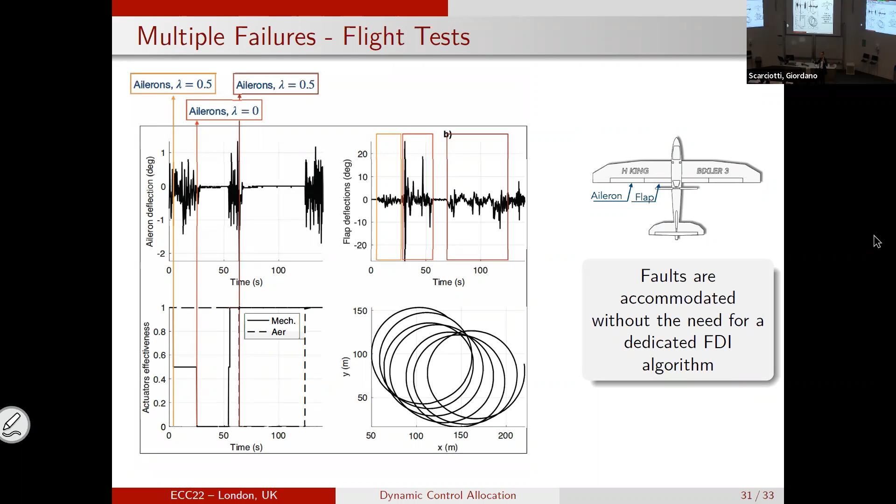And last thing I want to show, we have some tests on a scaled down model. This is, again, the work of Raffaele. We have here a scaled down system where the redundancy is only strong, but it's in the roll angle axis. And we have proven, from flight tests, that you can fail the aileron at any time, and then the flap reconfigures itself to do the job of the aileron. But most importantly, this is done without any fault detection and isolation algorithm. Simply by looking at the commanded deflection, the actual deflection, the algorithm figures out what to do.